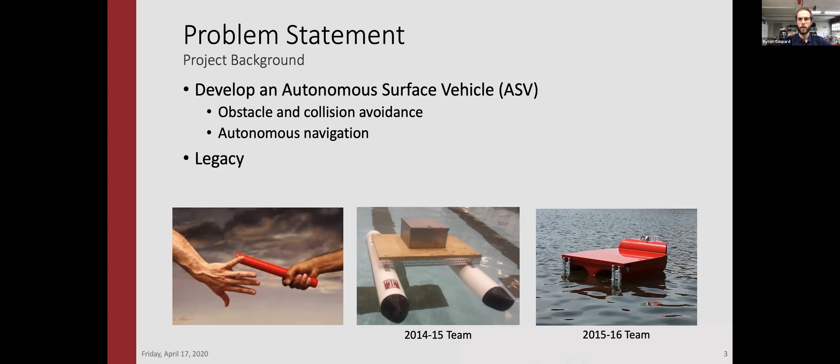And so 90% of world trade is carried by sea at some point, and reliability of this shipping network is critical, and its failure would leave millions without essential products. Between 75 and 96% of maritime accidents are caused by human error, and automating shipping vessels would largely decrease these accidents and increase the reliability of the global shipping infrastructure, therefore reducing collisions. And so this shows how it's aligned with the UN's Industry, Innovation, and Infrastructure Sustainable Development Goal.

Fuel consumption and carbon emissions could also be reduced with autonomous surface vehicles by optimizing path planning to minimize fuel expenditure. And so with these considerations, the automation of vessels is clearly an important engineering problem that should be addressed.

And so our functional requirements for this project were pulled from two places, either the competition's core requirements or pain points that we recognized after starting work on the project. For the competition side of things, the boat needs to be remote controllable, so it can be driven from dock to a specific course during competition.

An emergency system also needs to be implemented that can be used to safely stop the boat by cutting power to the motors. And part of that system is the status indicator lights, which indicate the operational status of the boat, whether it's stopped and safe to approach, whether it's being manually piloted, or whether it's autonomously piloted.

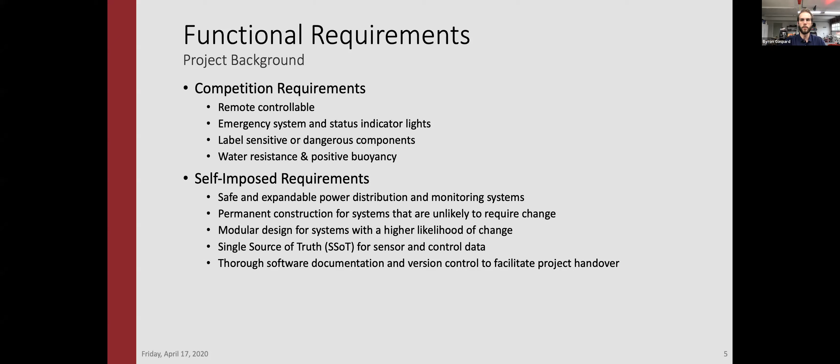And so the first portion of this we're going to discuss is the power distribution system. It was designed with three considerations. The first, safety: we determined that all electrical connections needed to be current limited to mitigate the risk of shorting out a battery. Additionally, a relay for each motor capable of breaking the 16-volt, 25-amp max load needed to be selected and installed.

For the simplicity portion of it, we recognized early on that one pain point would be transitioning between in-water testing and in-lab development, as all the components would need to be removed when in the lab and plugged into the wall power and monitors. And so to simplify this, we added shore power to the boat so that when you move back into the lab, the boat can stay as assembled and as it is, and you just need to plug in an external power supply, which is a modified Xbox power supply, and use a power changeover switch that you can see labeled on the screen to select between shore and battery.

We also wanted to make sure it was upgradable. So this is two parts. The first was selecting components that were overrated for what they were going to be doing. So the relays, for example, are able to handle up to 30 volts at 30 amps, and we're only putting in 16 volts at 25 amps right now. So there's room in that.

And also you can see on the fused connections that we have, there are open spaces where new components could be added to the system with relative ease and without having to do anything too drastic, as these are all connected through crimped screw terminals. And so it's relatively easy to add new components onto that.

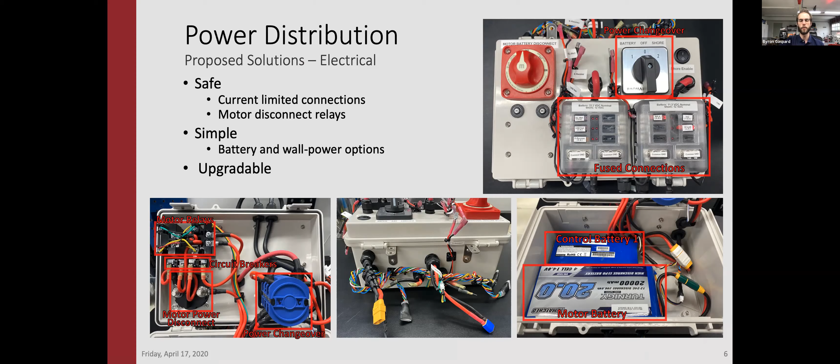To support the power distribution system, we also needed to develop a system that monitors the health of the batteries. The boat is configured to use 4 LiPo batteries. And these batteries can become irreversibly damaged if they are overcharged or over discharged, or if one of the cells becomes unbalanced. And the unbalancing can occur if a battery is under a high load for an extended period of time. All 3 of these faults can result in a catastrophic failure mode of thermal runaway, which is when a battery essentially will flame out and could even explode.

And so we want to be able to detect all of these things, so we can respond to them in real time, as opposed to finding out with a smoking boat as our indicator. And so the monitor circuit uses voltage dividers to step down each of the cell voltages, so they could be measured with one of the Mega 2560's 16 ADC channels. And each measurement involves averaging 100 ADC readings per pin, scaling those measurements back up to the value pre-voltage divider, and then sending those measured values over the serial connection to the computer.

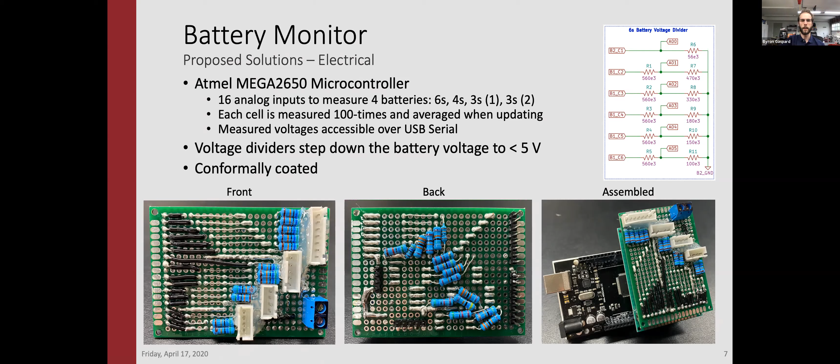And so here you can see the board. We have JST connectors for each of the balance terminals for the battery, where we connect and measure the cell voltages. We have the resistors for the voltage divider, and the board is all conformally coated so that water droplets or dust or other debris that gets on there does not short out the batteries accidentally. And we also have a quick schematic of the voltage dividers themselves.

The emergency system is composed of 2 subsystems. The first is on the boat and includes the hardware to control the status light and disconnect the motors. And the second is handheld and allows the user to remotely stop the boat and monitor the connection status with the emergency system that's on the boat. And it's safe in all practical failure modes, such as power loss, signal loss, or runtime error on either of the 2 subsystems. And the flowchart to the right describes the behavior of the onboard subsystem.

And so you can see it basically is continuously receiving messages from the transmitter indicating whether or not it is in the emergency state. And depending on whether or not it gets it, it will either enter the emergency state or stay in the normal state. And if it fails to receive 3 messages in a row, it can be assumed that a connection has been lost. And so the boat is put safely into the emergency state.

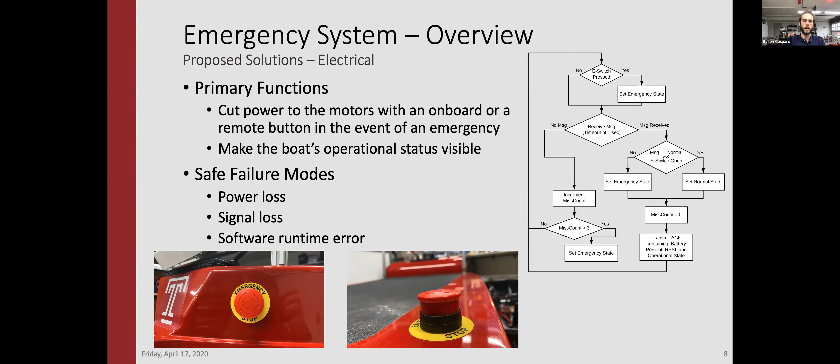So the motors are shut down. And so for the onboard portion of the system, both systems actually use the Adafruit Feather LoRa board. It's an integrated Arduino or Atmel processor with a LoRa radio, and was fabricated in a waterproof enclosure, as can be seen on the lower left.

The switches were selected for their water and dust resistance, and importantly, their EN 418 certification, which certifies them as acceptable for emergency stop applications. Similarly, the lights were selected as they meet the SAE Class 1 certification, which allows them to be used in emergency vehicles. And so they're visible at all times during the day and in bright and direct sunlight.

The remote system has the same board, but it has an OLED screen that also displays the connection status in terms of RSSI and the packet drop and success rate. It also displays whether or not it's connected directly, and whether it's in the stop or normal mode, as well as also displaying the percentages for both the transmitter's battery and the receiver's battery.

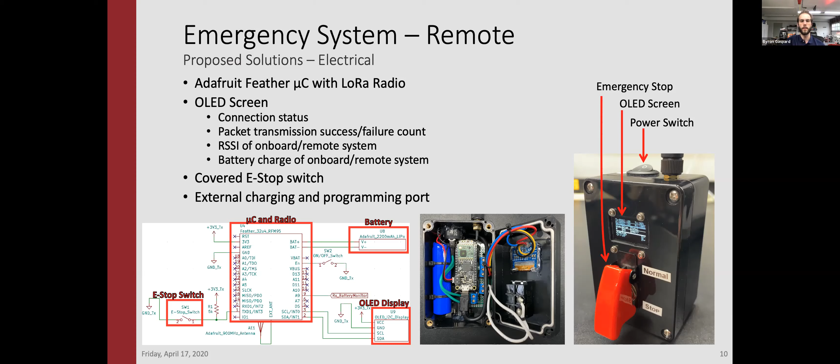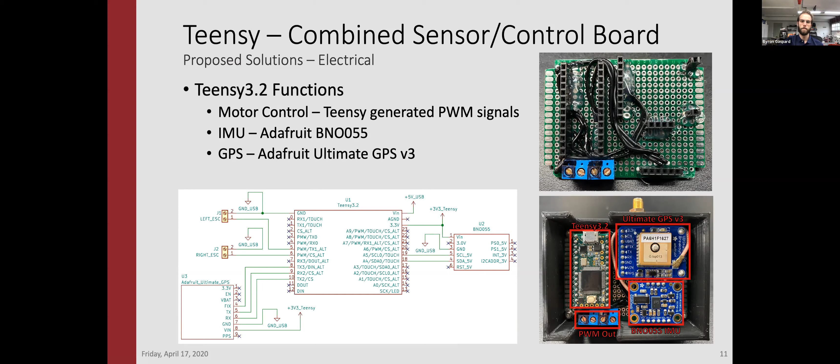2 other sensors that we're using in addition to those are the ZED stereo camera, which is used to collect image data for object classification and to obtain distance measurements and estimate orientation using comparison of frames.

The LiDAR that we have, the RP LiDAR, was purchased by a previous team, and it only scans in one plane. So this is not really practical when scanning out against the horizon, and so we decided to mount it as a push broom configuration. So it's mounted at an angle to the horizon, and it's basically scanning what's immediately in front of the boat, so it can detect any obstacles that the boat may be at risk of colliding with.

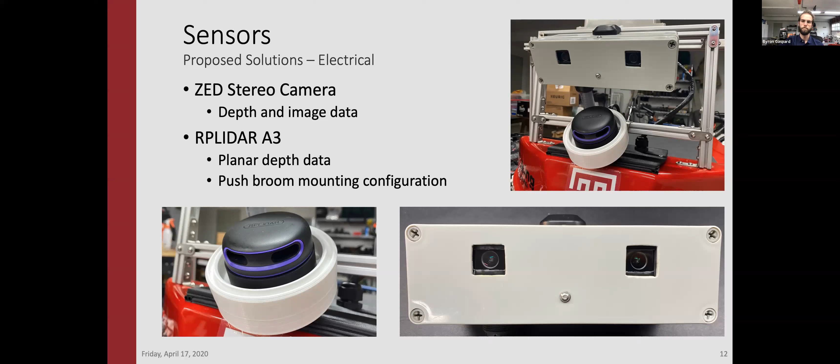For our compute, the Raspberry Pi and the TX2 kind of work hand in hand, but the Raspberry Pi is used as the boat's main control computer, and it's where the Teensy actually connects to. And so if the TX2 were to fail, the boat could still be driven using the Raspberry Pi. And the TX2 is really only intended for data processing and logging.

And so it interfaces with all of the high throughput sensors, such as the ZED camera and the LiDAR, so that the data from these sensors does not have to be unnecessarily transmitted over the network. And really all of the general control operations are just done by the Raspberry Pi.

And those 2 are connected using the TP-Link AC1750 router. They're connected with Ethernet through that router, and that router is also how you connect to the boat to control it. So you connect to that network with a laptop, and you can control the boat.

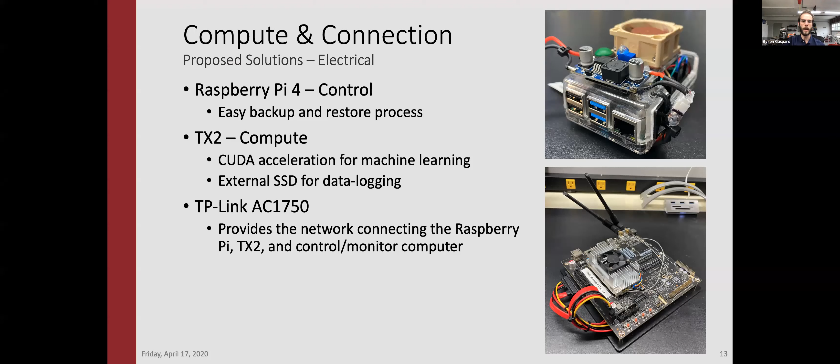We decided to go with ROS to provide the single source of truth, primarily because of its large library of packages and API that make integration and maintenance significantly easier. Of the 3 packages that we're using, the first is ROS Serial, which is used by the battery monitor to send cell voltages, and is also used by the Teensy to receive motor control signals and send GPS and IMU data.

ROS Bridge Server is used to create a WebSocket to gain publish and subscribe access to all of the network's topics in a web app. And ROSBag is used to record and playback sensor data for later analysis, which can be used when collecting data for machine learning. We're using 2 APIs, the RP LiDAR API and the ZED API, which allow us to interface with those 2 sensors respectively.

And so the human machine interface was developed with ROS Bridge. It's a website that was developed with HTML, CSS, and JavaScript, and it provides real-time control and real-time monitoring of the boat. I'm gonna just mention it briefly here, but we're gonna come back and look at it at the end with a demo.

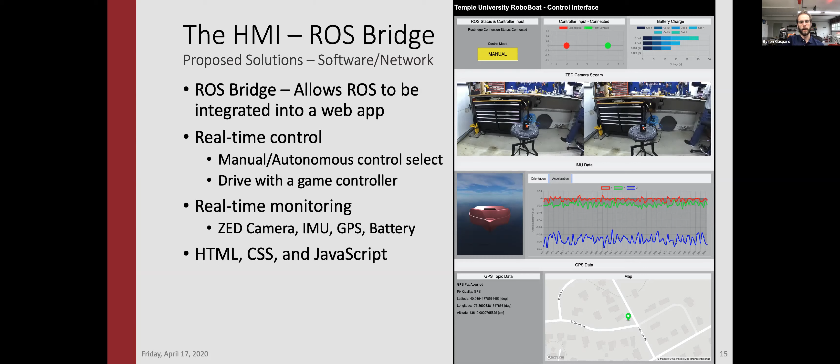The motor mounts on the boat needed to be redesigned because the previous position where they were mounted had holes in the bottom of the boat that were consistently leaking, and we couldn't get them to be patched, so it just needed to be redesigned. So it was designed in 2 parts, connected through a dovetail joint so that it could be easily disassembled when transporting the boat, and to also make the parts easier to print.

The motor was also located as high as possible in the water, which reduces the torque loss as seen by a boat pitching up when it's accelerating or decelerating. And it was also located as far forward as possible, which decreases the turning radius as the motors are closer to the center of the boat. And these mounts are fabricated with 3D printing.

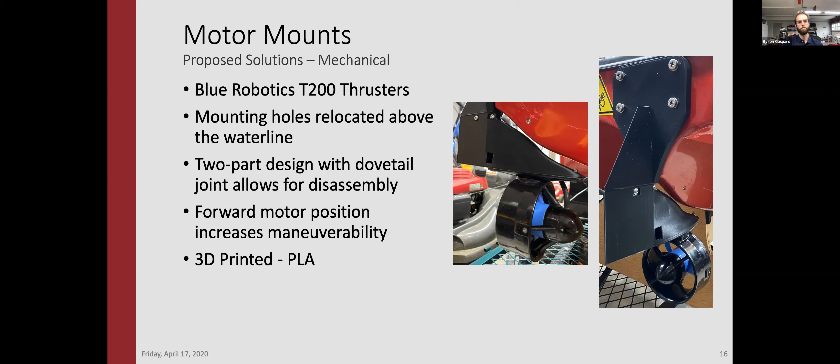So on to our testing. The battery monitor was calibrated and tested at charge voltages between 3.2 and 4.2 volts. These are the accepted minimum and maximum charges for a lithium polymer battery. For these tests, they were first discharged all the way to the bottom range, and then the batteries were measured with a multimeter to gain their actual value, and then plugged into the battery monitor board, and the recorded

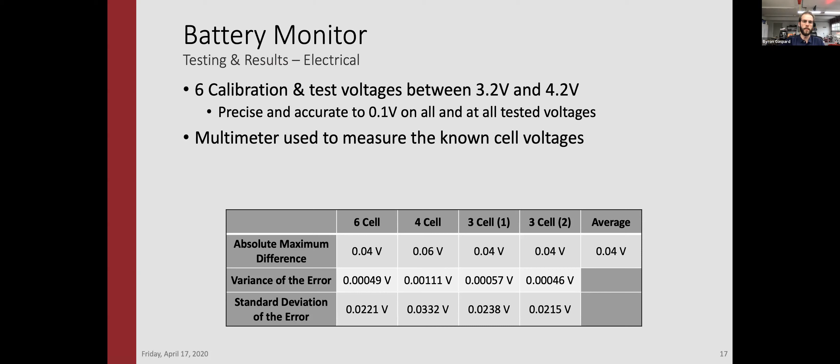value was measured. After the calibration, the absolute differences in our tests between the battery monitors were then averaged. The maximum of those absolute differences were taken for each of the cells. So for the 6-cell battery, there would have been 6 averages. Their values can be seen in this row here. The average of all of these is 0.04, and the highest absolute maximum difference that we have is 0.06, and that's within our 0.1 volt requirement that we specified.

The emergency system, we were able to test 3 of these criteria. Duration, first, is to test for intermittent errors, so we ran the transmitter for approximately 4-hour test durations. We ensured that there were no disconnect events, and we made sure that it was reliably working at 30-minute intervals and able to safely make and break the motor power.

The latency is a test to make sure that the time between triggering the emergency stop and it actually being executed is not too significant. We did this using an oscilloscope connected to the output and the input of the emergency systems. The time that we had specified was 2 seconds, and for both of those, the worst case is 400 milliseconds, so that's well within what we required.

The test that I just described was the latency test, but the disconnect test is just to make sure that whenever the transmitter and the receiver lose connection with one another, the boat safely enters the emergency state. So we did that test 10 times for the transmitter, where we just turned off power and made sure that it entered the emergency state. And those 3 were able to be successfully completed.

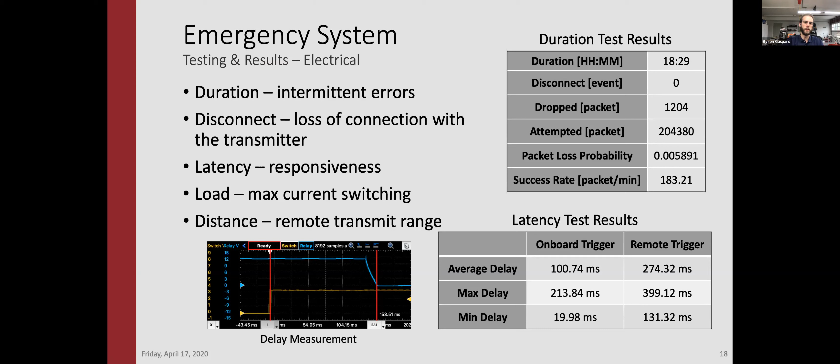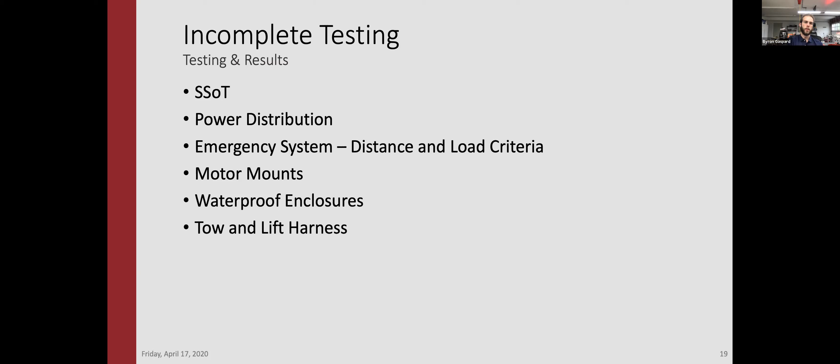We were not able to complete these test methods because of either limitations on how much time can be spent on the project now, because I'm the only one who can be working on it as the boat's in my house, or because we no longer have access to facilities to perform the tests. Here's our schedule. Everything is pretty much buttoned up with the exception of that testing. We might be able to complete a little bit more in the next couple of days before we have to submit everything.

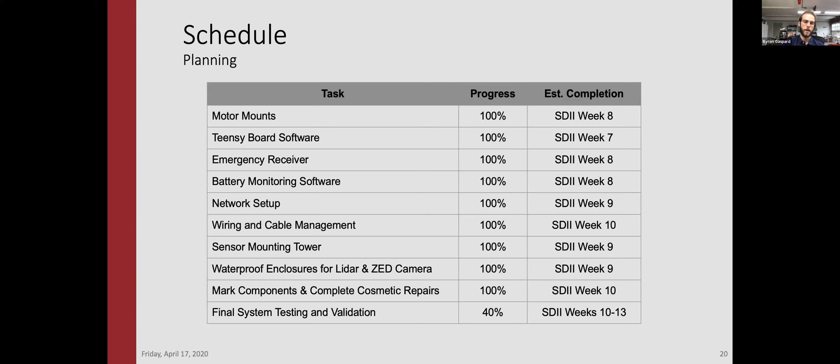And so we'll pull up my screen share. First, change my camera.

Change my screen share. All right, you guys see my web browser? All right, cool. Yes. So I'm gonna open up this.

So this is the human control interface, and while that's still loading up, I'm going to show you quickly the remote emergency stop. And so you can see behind me on the boat, there's a red flashing light, which indicates that it's in the safe state. Motor is disconnected, or power is disconnected from the motors. And so if I were to lift the switch, it switches yellow, indicating that we're now in the manual control mode. And if you were to close it again, it should go back to red.

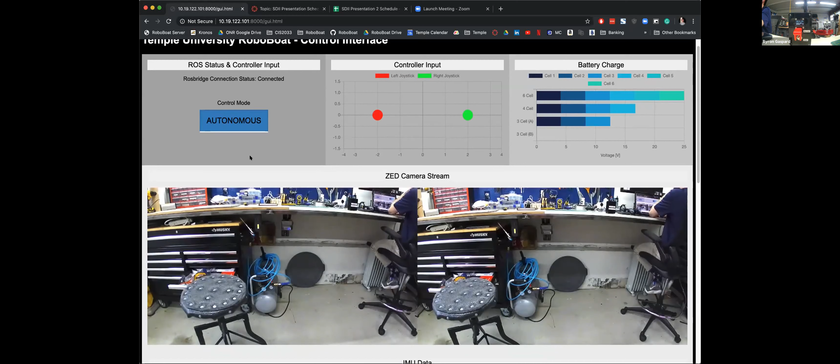Similarly, if we press manual here, it changes over to blue, indicating that it's in the autonomous functionality mode, so that now it would be piloted autonomously. The actual functionality of this button could be increased later on, but it's just to show that we can send the control signal, so you could make this so it would do a specific autonomous course, like the channel navigation course. Below here, we have the live stream from the cameras from both sides of the ZED camera.

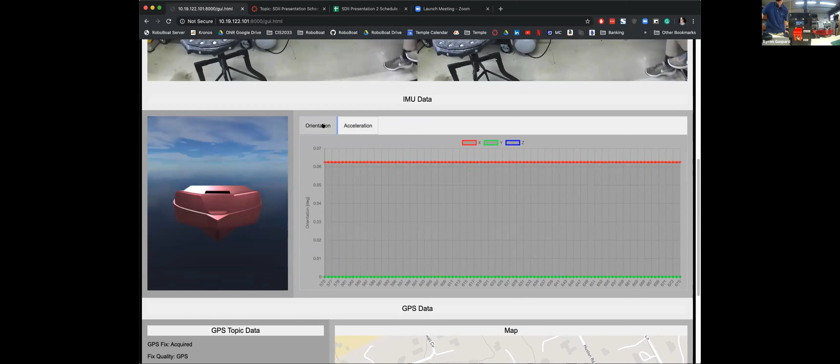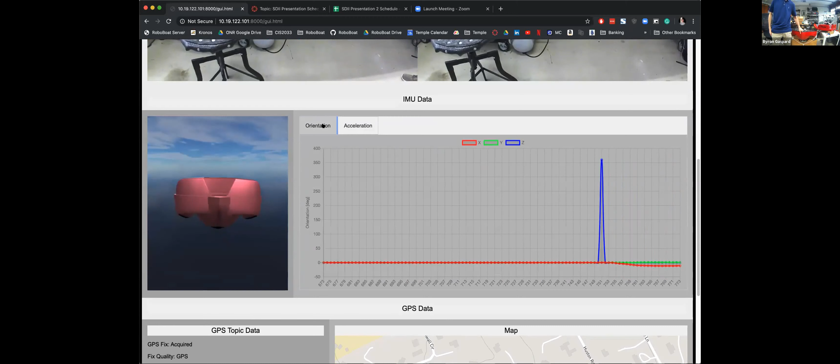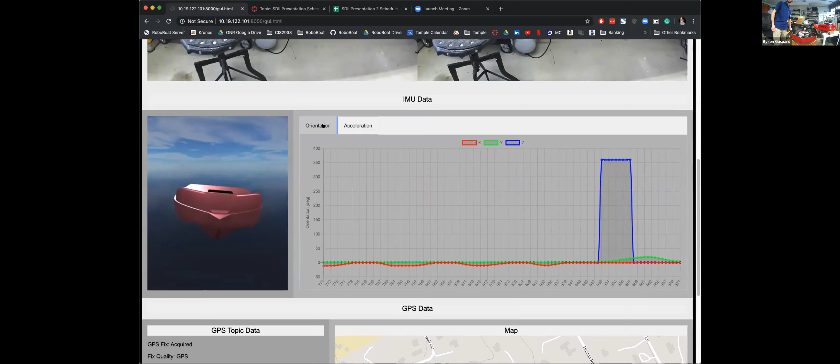Here we have an orientation and acceleration plot, as well as an animation. So you can see here, let's move this a little closer here. If I move the boat, you can see that reflected in the animation there. So that's in the pitch, that's in the roll. And then lastly, at the bottom, we have the GPS data that's both given in coordinates and then also plotted in a map.

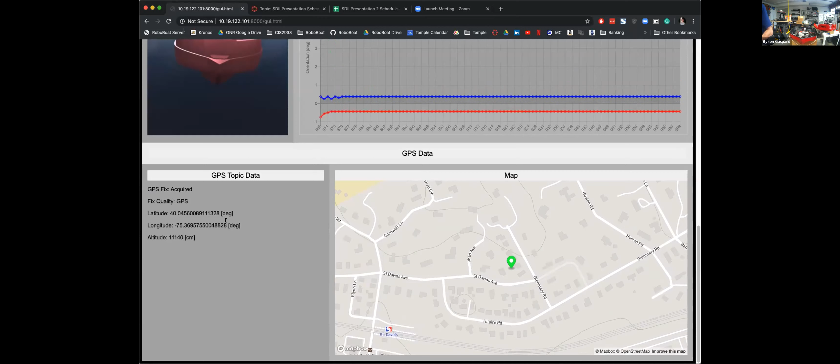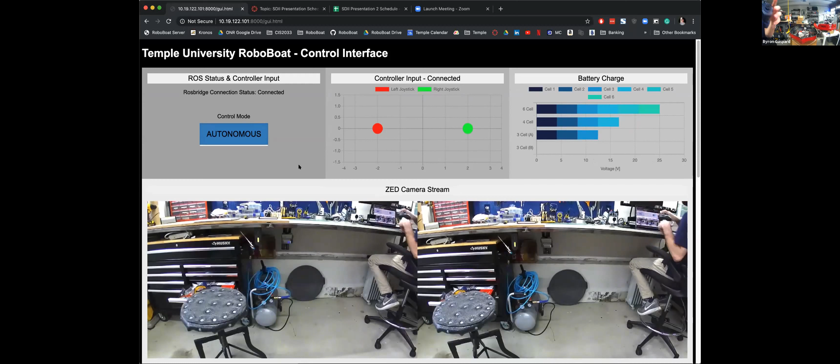But that's it from us, and we'll take any questions. Oh, wait, I lied. There's also the controller. So it's controlled with a game controller, like an Xbox or a Logitech controller. And so you can see on screen those two plots moving around to indicate the position of those. And so each of these joysticks control a motor independently. So full forward, full backward, turning.

So you're just demonstrating there that your software interface can see the signals from the controller, is that right? Well, it's verifying that it's actually being published to that topic, because the way that I made this update is so that it does not read the value from the controller and then immediately plot it. It waits until it sends, and then it subscribes back to whatever it just sent. So it makes sure that's actually getting to where it's going. And we verified the PWM signals generated using an oscilloscope connected to the Teensy motor board.

Can you talk about that chart right there where you're showing the battery charge? What's that showing us? So if you hover over it, it gives the individual cell voltages, and so you can see those distributed for each one of them. So for the 4-cell battery there, we have voltages, like for the smallest cell, we have 4.13, 4.2, all the way up. Okay.

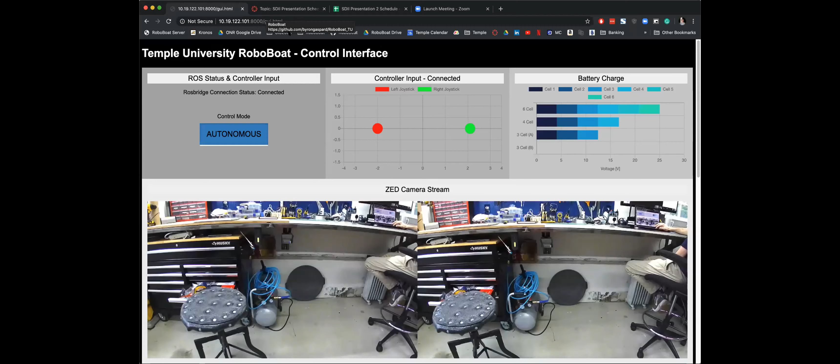Can I ask you a question about the orientation sensor that you had? Yes. So those are degrees, roll and pitch? Yes. And if you rotate it, it actually changes. Can you do that? Yes, I can do that again. One more time.

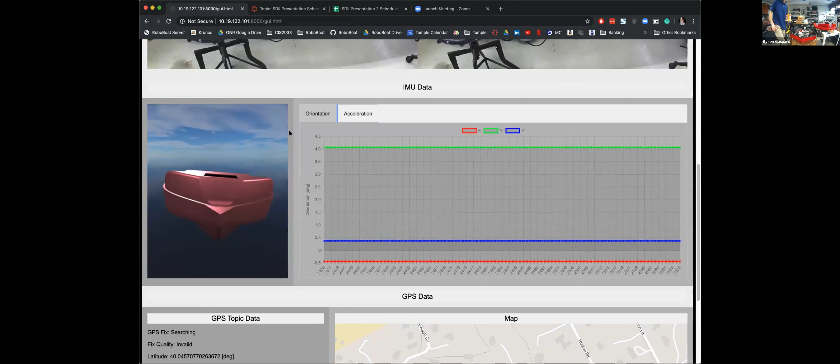So we pitch it. You can see it's plotted there as well. So we roll. Oh, that's not 4.0 degrees, is it? Because it seems like that.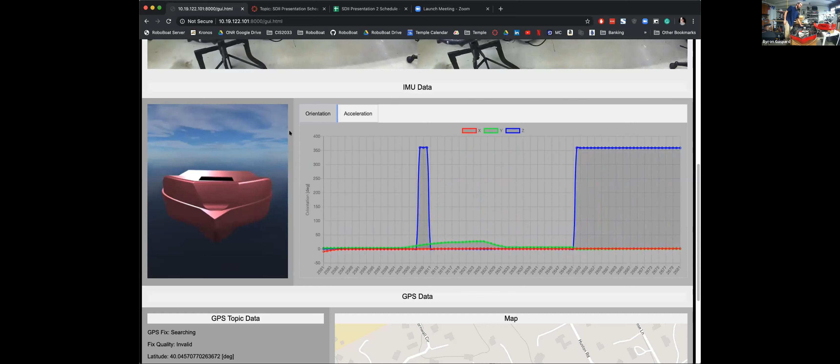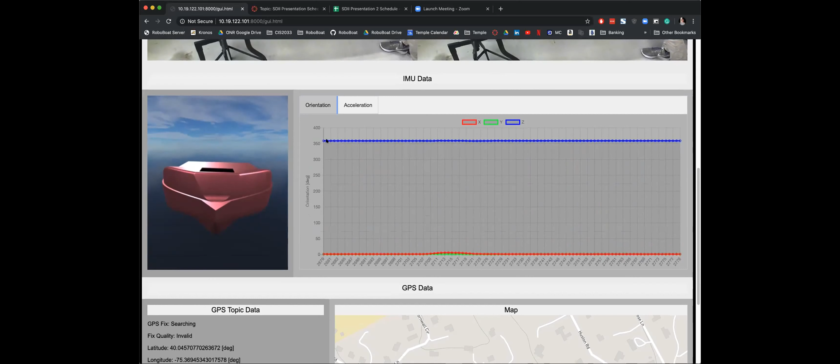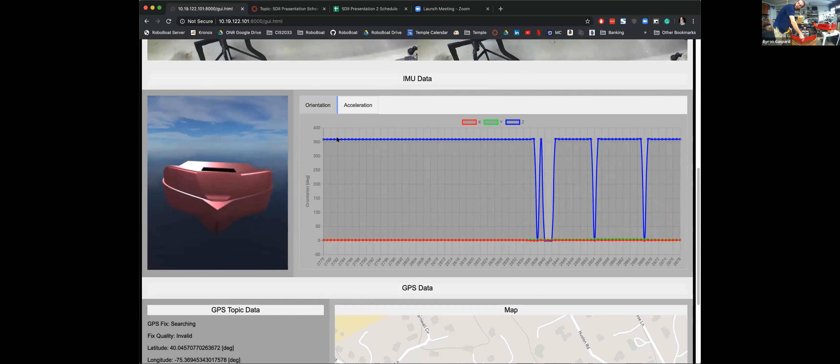No, the way that the website is updating, sometimes it does error out like that. If you look at the actual topic data, I still haven't figured out exactly why it does that. Oh, really? Okay. Well, right now it's at 360 degrees, so it overflowed from 0 to 360. So it's barely at the... See if I just tilt it, in which direction is that? Z. See, now it goes back to 0.

Is this data from the IMU? Yes, this is data from the IMU. It's at 360 degrees here. So it goes from 0 to 360 when you bring it negative. When you are using an IMU, you have to initialize it first. Then you have to either use accelerometer or gyroscopes, right? Which sensors do you actually use to calculate this angle?

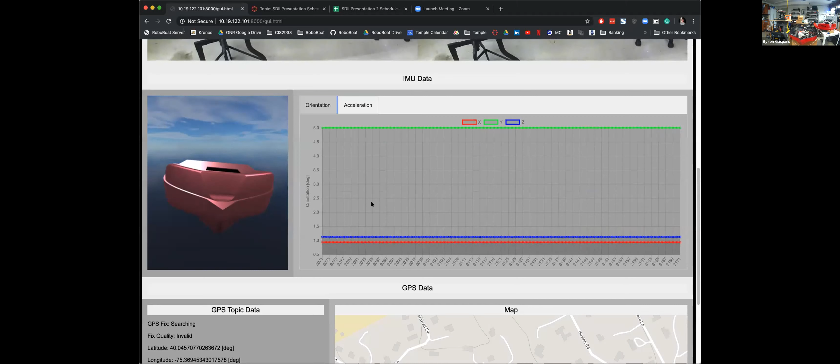No, this IMU is one made by Bosch. It actually has a Cortex M0 processor in it, and so they're actually fusing all the data from the magnetometers that they have, as well as from the accelerometers and the gyroscope on there to just give you an absolute orientation output. Oh, so you don't have to do any of that. Yep. Okay. That's all the questions I have.

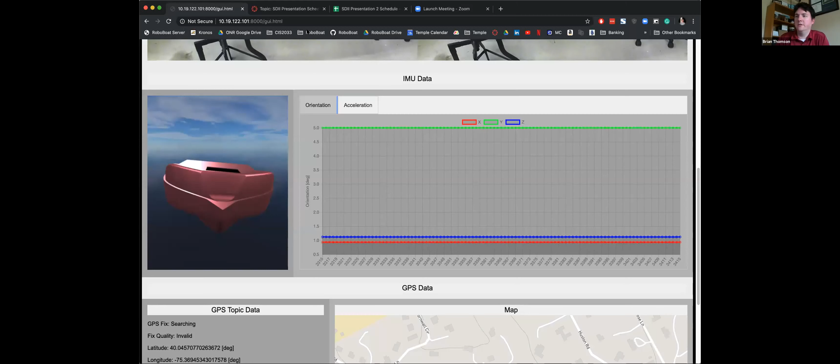Thank you. Any other questions from the audience? Can we just talk about maybe, so you have a lot of nice demonstrations here. Assuming the situation was normal, what kind of other experiments would you want to run with this, given where you're at now and where you want to be? I mean, it would be great to actually put the thing in the water and try to drive it around for an extended period of time. Because the one thing that Dr. Bai and us were concerned about is the latency for the video.

Because ideally when a team would be training the model, they want to be using only the data that the sensor or the model would actually have access to when making decisions. And so you wouldn't want to be training the model by looking at the boat from just a normal perspective and driving it around. You want to be looking at what the cameras can see and make your decisions based on that. Otherwise, you're going to be giving it some weird input that it doesn't understand. And so that is what we would like to try to do. We were initially going to go to a park by my house, but it just didn't work out.

Yeah. And then I guess the only other question I was wondering about is, were you able to validate the battery monitoring system, or how do we know that that's reporting the right voltages and things like that? The battery monitoring system? Yeah. I thought we discussed that. It was in here. Battery monitor. Let me change my share.

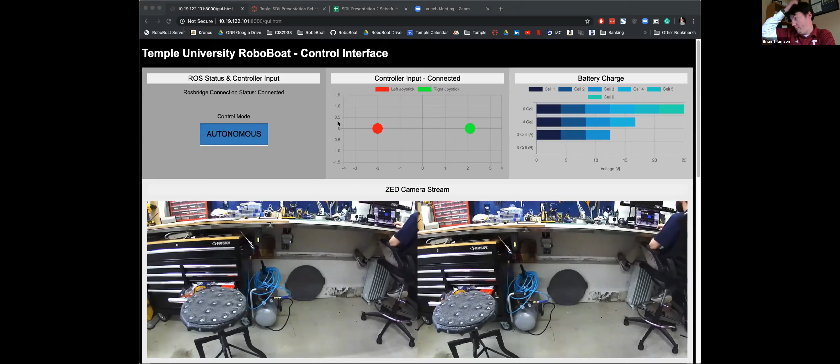Maybe you did. I might have just missed it. Oh, you did. That's right. You showed experimental results, right? You had a max difference of 0.04. Okay, now I remember. I'm sorry. Yep. Okay. I don't have any other questions. Anyone else in the audience have questions?

How shallow is the boat able to go? How shallow? I think the lowest point on the boat still is going to be the motors. And so, assuming that you're talking about a pool and not any debris that's going to get sucked up into the motors, like you would get in a pond or something, I think you could comfortably drive it around in as little as a foot of water, as long as you're not too crazy on the acceleration, causing it to pitch up.

Are you worried at all that murky water would interfere with the boat's ability to navigate well? Not really. We're designing for the competition, and the competition is at a nice pond, and we've seen pictures of it. Things in the water that we're not expecting are not really something that we have to be too concerned about. And competition staff are also in the water, so they're going to be clearing out any debris, like any sticks or anything else that you might be running into. And so it's not really something that we have to consider.